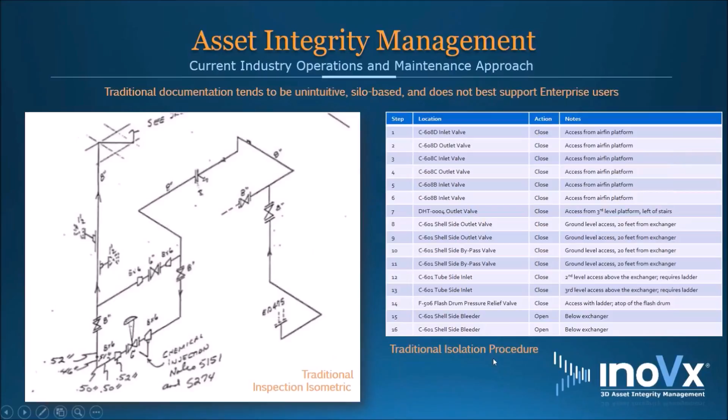And what INOVX is doing is taking the old way of doing things and really turning it on its ear by integrating that active 3D model with your current systems of record to replace your isolation procedure with something much more intuitive that provides context, that provides much better insight into what's happening and what needs to be done for that work. We're getting comments from companies like Shell saying that an hour inside of the INOVX technology is like spending 8 hours in the field.

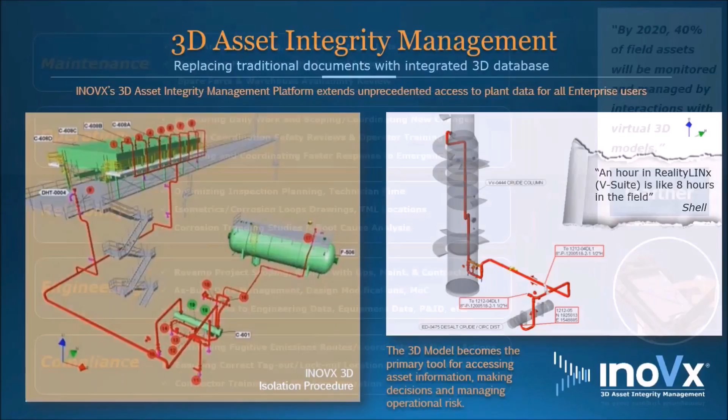What we're doing is really bringing the field to the desktop. We're bringing it to the tablet, allowing for users across your enterprise to come together in a virtual way and solve problems rapidly with good, consistent information. This extends beyond just inspection and maintenance. We go into areas of engineering, compliance. When we talk about things like inspection, of course, that really speaks to reliability, optimizing the way your resources are focused.

We'll get into some of these specific examples in a little bit, but what we've really seen with our platform is that because we're implementing this active model tied to your existing systems of record, the layers of additional solutions become natural.

We've got a single hub of very virtual or very intuitive look into the facility, and maybe if you start off with an inspection solution, we'll hear from one of our guest speakers, it can very quickly grow into other things to help the enterprise with other activities at the facility.

And so again, we'll get into some specific examples here in a little bit, but it's really no wonder that companies like Gartner are saying by 2020, 40% of these assets will be monitored and managed in some way with virtual 3D models. And we believe INOVX is at the forefront of that as a thought leader, and we'll show you some examples. Because we're integrating with existing systems, the kinds of things that we're able to do is visualize your facility in ways that you couldn't previously.

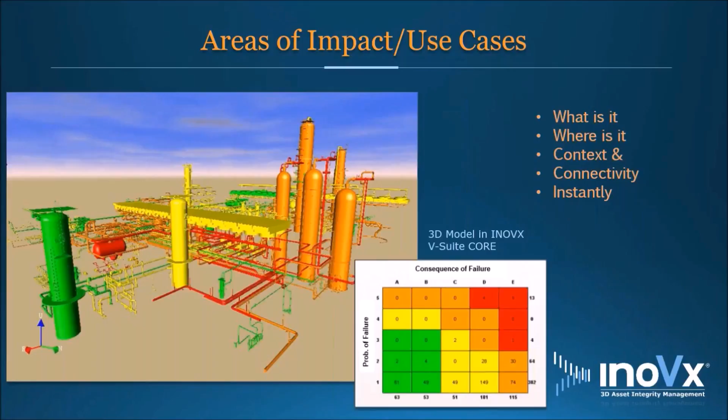And these are the kind of things that we're doing for things like corrosion or things like safety zones, and very quickly visualizing your plant and your assets in ways to help decisions be made and actions going forward. One of the other examples that we really talk a lot about, and you'll hear more about this today, is around inspection, mechanical integrity.

This is an example from NCRA or CHS, and we'll be hearing from them in just a moment, where they've really taken their entire mechanical integrity system and used this active model to replace or augment what they were doing previously. And so this little control valve manifold here is a representation or a replacement of that inspection drawing. So this is the way that INOVX manages that drawing, if you will, in something we call a knowledge view. And again, we'll show you some live examples in a moment.

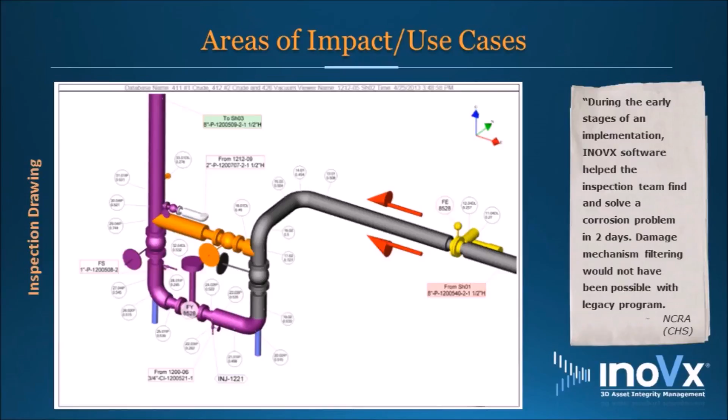And each of these points represent either an inspection node or something that needs to be done, say a dead leg example. And the color coding also fits with some information that's tied to that system of record. I think we're going to go into a little more of what this means when we introduce our guest speakers, and I think that's probably a good segue to introduce that. Today we're going to hear from CHS, and so Susanna, would you mind making the introductions, please?

Yeah, thank you, Dave. So you're going to have CHS. The McPherson refinery is an 85,000 barrel a day refinery with most of its crude oil that it refines from local Kansas producers. The refinery is currently undergoing expansion to 100,000 barrels a day, and its primary products are gasoline and diesel. Our panelist, Jason Frazier, is a plant engineer, and he's worked at the refinery since 2009, supporting the fixed equipment and the mechanical integrity program, including plant-wide piping inspections and RBI initiatives.

He's also responsible for developing the plant-wide 3D virtual model, including all of the process units, or 27 different units. He's a graduate of Kansas State University with a BS in mechanical engineering, and he's also a certified API inspector. Randy Lanhart is the engineering supervisor, and he's been at the refinery since 2010. He's managing the fixed equipment and mechanical integrity program, including the plant-wide piping inspection and RBI initiatives. He's also a graduate of the University of Nebraska with a BS in civil engineering, and he's a registered professional engineer and certified API inspector.

So with that, we're very excited to introduce Jason and Randy, along with Dave Reinhardt, facilitating the discussion. Dave, Randy, Jason? Thanks, Susanna. So what I'd like to do is, first of all, thank you, both Randy and Jason, for joining us this morning. What I'd like to do, yeah, great.

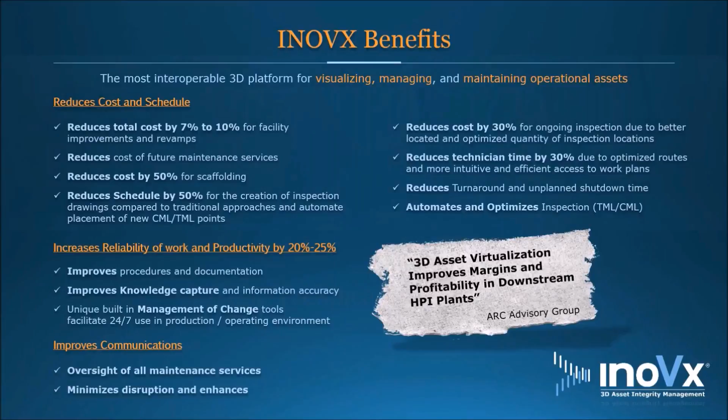And something that we'll talk about in a little bit is an onboard unique management of change tool that INOVX deploys that allows end users like CHS to maintain and sustain that model in an operating environment. So the big difference between what's happening at the plants versus when we're creating models is they're needing to use it in a 24/7 environment for all the kind of things we talked about. So we're seeing a lot of benefits across the board. ARC says that our 3D asset virtualization improves margins and profitability in downstream plants. We're actually seeing that upstream also in different markets.

So having said that, we'd like to go to a technical demonstration. V-Suite actually has several components. As I described previously, it has a client-server application piece. It has a web-enabled component, and we even have a tablet or a mobile component that we can take offline and actually bring these advanced work packages into the plant.

And so as part of this demonstration, the first thing I'd like to do is review the desktop application. This is what we refer to as V-Suite Core. And this is really our authoring tool, or how we create the content. And so when CHS was speaking to us, they're primarily using the desktop application. So we'll go into a little bit of how that's being used, not just there, but in other sites around the world. So what we're seeing here today is the user interface.

And on the left side, we have a database browser. This is my sample project. I've set something up for inspection in this case. But again, this could be for things like plant maintenance or construction scheduling. Today, we're just reviewing mainly inspection, but hopefully you can draw some lines to some of these other solutions.

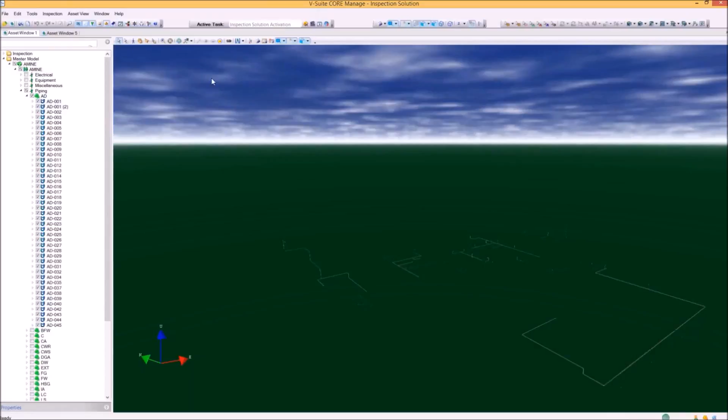So the first thing you'll notice is that I have a hierarchy here, sort of a folder structure that's not unlike my Windows Explorer. I've got a tree, and if I drill down in here, I can see different kinds of assets. And by checking the box, I actually can display these assets in my view. Let me just turn on all the piping. And so this is the piping in my sample model here. If I want to turn on the rest of the model, I can just check that box.

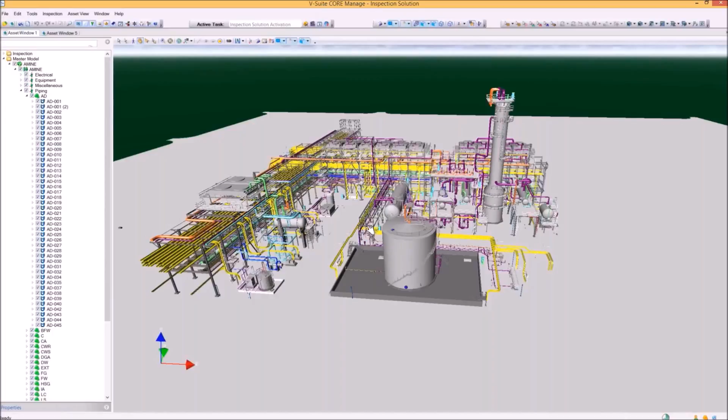V-Suite Core is a desktop application. It doesn't really require a heavy-duty computer. I've got probably a 3 or 4-year-old laptop I'm running off of today. And so you'll see I can quickly turn on and off different sections of the model. I can drill down and navigate and see how things are organized.

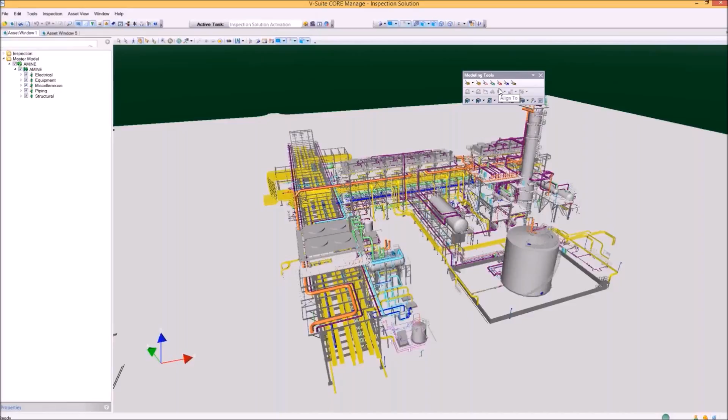Now these models are created, as you could hear in the earlier discussion, either from laser scanning or what we call model conversion. So we have some really good modeling tools in the software that allow us to build from scan data. INOVX is also a partner with Edgewise 3D, and so we can leverage automation. We also have some good assisted modeling tools.

If you have a 3D model that's already been created for your engineering, we can actually update this from different CAD sources. And so we have lots of ways of creating these models to get something deployed quickly and also accurately. And we can go into much more detail on that, but given the time today, let's dive into some of the solutions.

So the first thing you'll notice is that I've got this model organized by engineering discipline, if you will. I've got these different hierarchies organized by the engineering discipline. And one of the things that INOVX does is we have a role-based application, allowing users to log in with different roles or responsibilities and also have different entitlements in terms of what you can do. I'm logged in as an administrator right now, and I can see the 2 different workspaces.

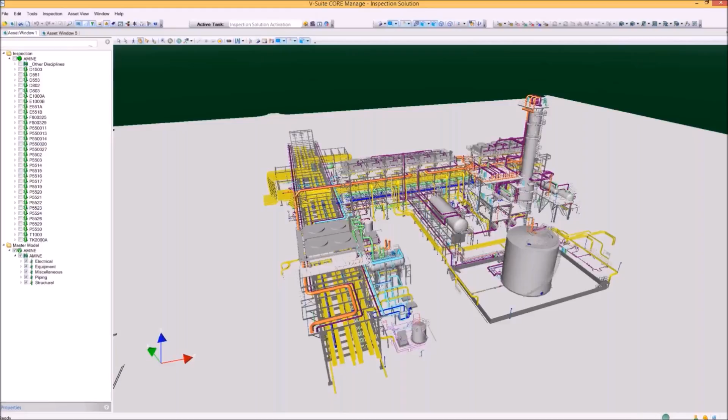But if I was just an inspector going out to either perform inspection or create work packages, I would only see the inspection workspace. Now what's interesting about this is it's exactly the same model. It's just organized differently, and I'm seeing them both here in the same view. So if I clear my screen and turn on the inspection workspace, you'll see it's exactly the same model. Maybe there's some different color coding, and maybe things are organized differently.

And so in this case, I've got my corrosion loops or my inspection circuits. It looks like I've got all my inspection points turned on. Let me just turn those off. And so now I'm seeing the model very much how I'm used to seeing it in my system of record, like PCMS that CHS was using. We also integrate with other systems like Meridium and others.

And so this model now is organized just how I would expect to see it in the way I manage my work. And for this one, again, we're looking at inspection. So with V-Suite Core, we have this extensibility and interoperation that allows me to integrate with these different systems.

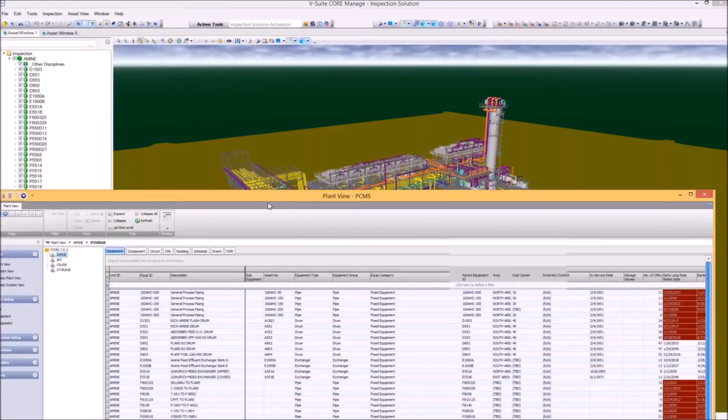And so I'm going to go ahead and log on to my inspection program. And what you're seeing now is that V-Suite is actually connecting to the target system. And what I've got is a system of record. In this case, we are using PCMS. And so what it did is it logged in.

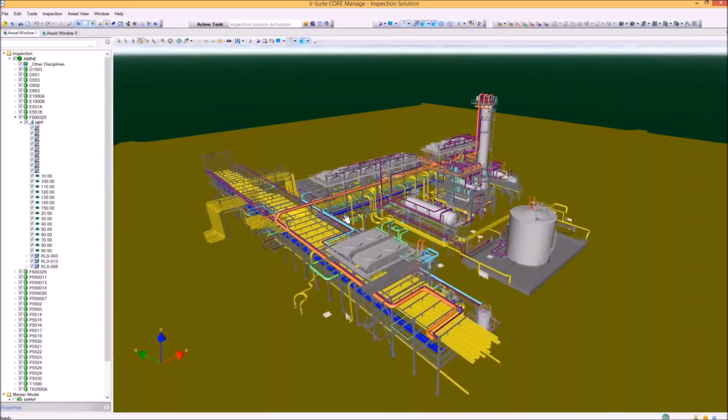I've got the application loaded locally for this demo, and so it fired the application, and it's running in the background. We can also configure that to just connect and not necessarily run the application. So you don't even have to have the app loaded, but it will connect. And so now not only do I have access to my different circuits and loops and various attributes, but I've got information about those assets that's being pulled directly from my system of record.

So in the interest of time, I'd like to jump ahead and show you some of the things we're doing with that. And so one of the things that our inspection group might use is the searches or some of the advanced tools. And so one of the things I might do as an inspector is say, well, I'm really interested in understanding what I have to do in the next 30 days. And so what I can do inside of V-Suite Core is say, hey, go ahead and find that information for me.

And so what it's doing when I run this search is actually reaching into the system of record and saying, well, look, in the next 30 days, I've got these 61 points that I need to go and inspect. And so, albeit this is interesting, it still doesn't really tell me where it is and what it is and how I'm supposed to work with it.

So as part of our inspection solution, what we can do is configure this to actually automate the creation of those drawings that Jason was mentioning. He's calling them inspection ISOs, really, but what they are is what we call knowledge views. And we can create this inspection work package on the fly.

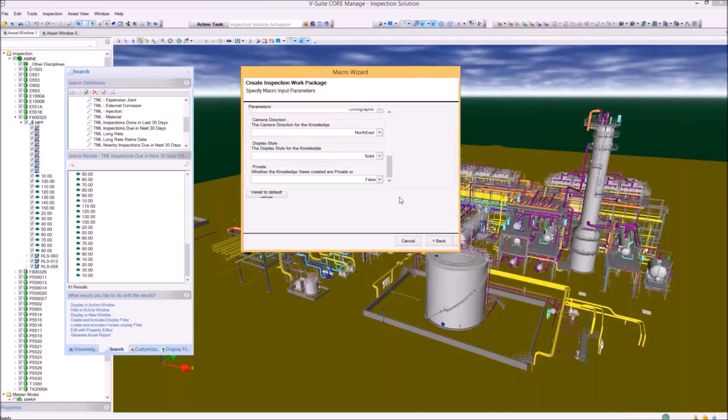And through a wizard, we're actually using that search definition, we're getting these 61 assets, and we're telling the software, I want to go ahead and create these views, I want to understand where it is and what it is, and go ahead and create the knowledge views. Now, if I was to launch this, it would probably take about 5 or 6 minutes, so I'm going to cancel this now. But what I'll show you is sort of what the results would be.

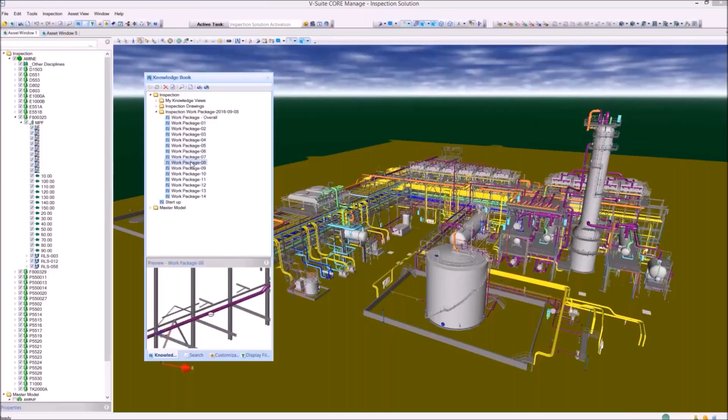And we have this thing called a knowledge book, because the model organization is interesting, but in fact, what we're finding is that to create these work packages, our knowledge book is where the power really lies. And so the results from that query that I just ran was an automated creation of these knowledge views, or active isometrics, as we like to call them.

This is an active 3D model, and it creates that work package that says, okay, not only are these the points that you have to inspect, but these are the adjacent equipment and adjacent structure, and it's not just a 2D static image, but it's actually a 3D model. And so as I zoom in, I can get some context about this. I can take measurements, I can click on these assets.

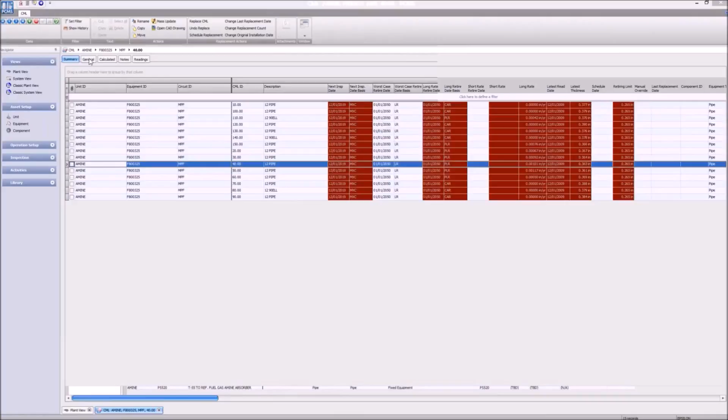If I select any one of these points and pull up the inspection properties, it actually goes directly into my system of record, retrieves that information, and takes me right to that field in that record. And so this is actually the information about that item. And so I've got this interoperability between my systems.

As Jason described, we can color code based on these results, and that's what we're doing in many cases. We have another one of our end users that's actually taking this data now, and through filtering, we're displaying the model with red for failure and green for good, and then all the colors in the middle for how corrosion and damage is being tracked.

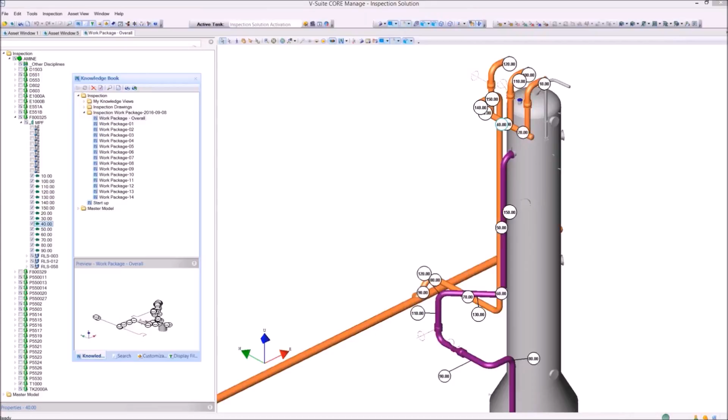And so this is a very robust system to allow me to organize the model, set up my advanced work packages, and create these knowledge books that I can then distribute out to the rest of my user community. And so this is just a quick look at the desktop application.

So let me bring you now into the web tool. Once we have accessed and created our different work packs, what we can do is actually launch V-Suite online, and let me go ahead and do that.

And so by setting up your entitlements and by setting up your different user communities, I can actually go out to my server, whether it's on my intranet or maybe it's up on something like Amazon and hosted, and I can sign into V-Suite, and I can access those same knowledge views from anywhere within my enterprise.

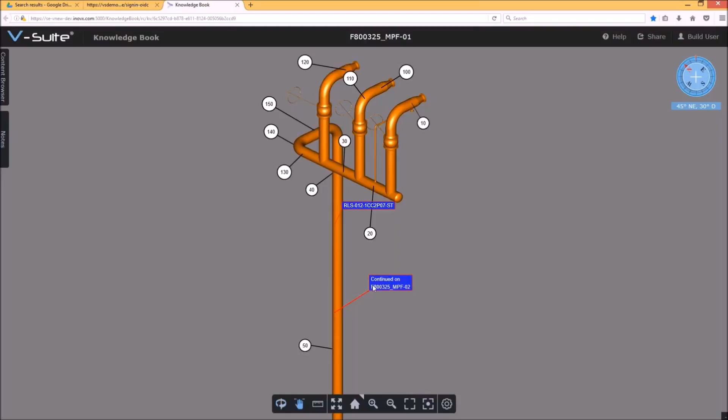Now, where this adds power, of course, is through a web-based architecture. I can now launch this and make it available to my entire user community, to my contractors, my subject matter experts that might not be available in my local office, bringing people together from around the world. And these knowledge views now are available to me in my online space.

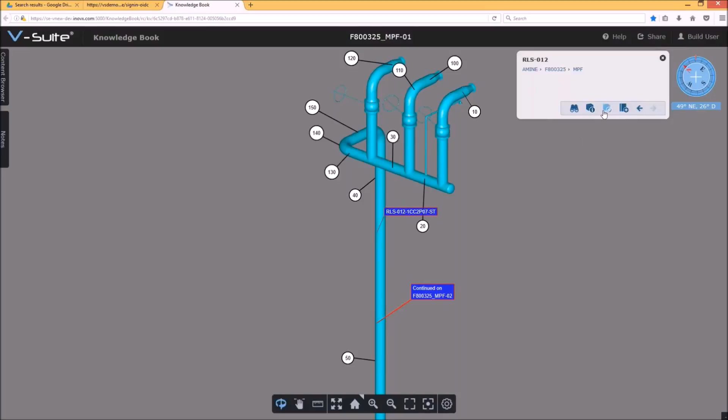I've got the same sort of interaction that I did in my client-server desktop application, and I also have access to the asset information. So by just clicking on these assets, I get a little quick tip here. I can navigate up in the hierarchy and maybe select this entire circuit, and I can get more information about that.

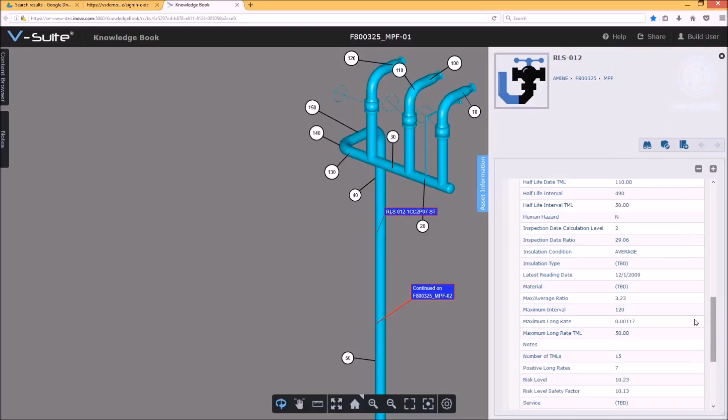The same is true when I have access to the system of record. So for example, now I've highlighted the entire circuit. I can get more information about that. Here's some circuit information. It's actually going live now out to, in this case, PCMS, and extracting that data and getting what I need for my work pack. You'll see when we talk about the mobility in the tablet, this same information is available in an offline mode, and I'll show you that in just a moment.

And so what I like about this too is now when I've got my mobile and my tablet, we also have the ability to create new content. We have the ability to capture more information. And so one of the things that we'll do as part of these advanced work packages is we'll set up the ability for end users to capture notes, capture information, or if it's part of a work package, we might actually include information about what needs to be collected.

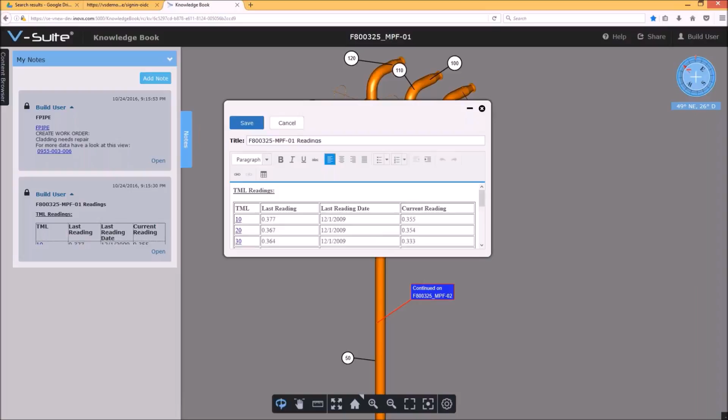So for example, if I'm going out there to inspect these points, one of the things I might need is information, say the last reading that was captured, or maybe if it's a lockout tagout procedure, it might be the sequence of events of things that have to happen, and this could be a template that drives this work pack and what's available to you.

And so as an inspector, or maybe it's a maintenance person, if I finish the task, I can simply go here and edit this activity, and maybe this one is 0. Let's say 300, something like that. Save my results, and when I'm online, this immediately is available to my other V-Suite end users in the tablet. If I'm in offline mode, that information is still captured, and then once I have access to my network again, it's immediately pushed back up to the V-Suite database.

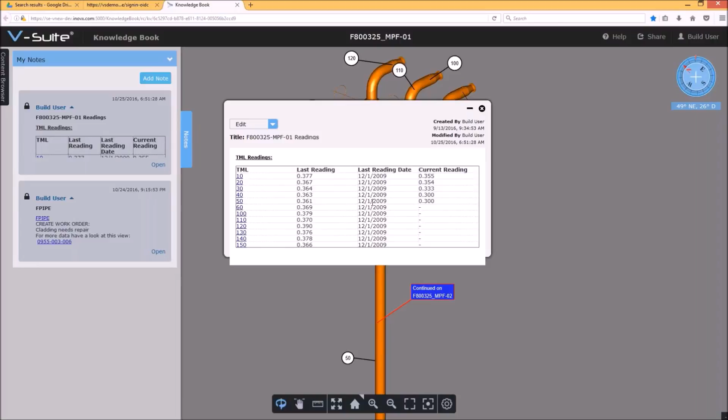Now, what's really, I think, even more powerful about this is that I have the ability to also, through our adapters, push this information into the systems of record, depending on how your IT is configured. Okay, so there's certainly a lot to talk about here, and we'd love a chance to show you a little more about this. But given time, I'd like to go ahead and jump forward to some of the mobility stuff. I can't show you a tablet on the screen here, so let me go ahead and just fire up a video, and I'll bring this over.

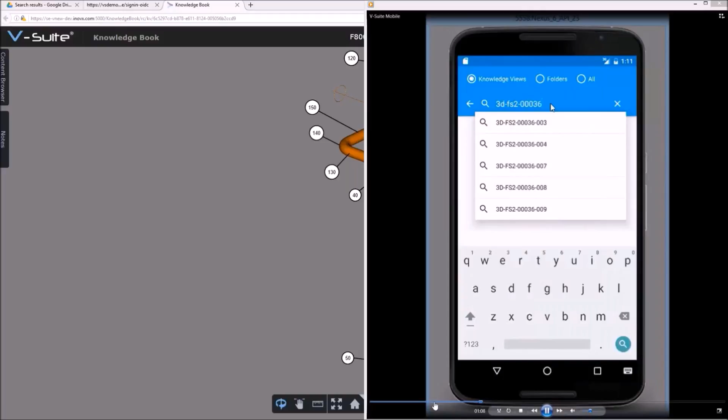And so what we have today is the ability to load the V-Suite Knowledge Book for your tablet and mobile device. Today, this is an Android system. Early next year, you'll be able to use iOS. And so what we're doing here is in real time, we're showing how you can log in. And if I have certain knowledge views I'm looking for, I can begin to query that, and I get a lookup list based on what I've begun to type.

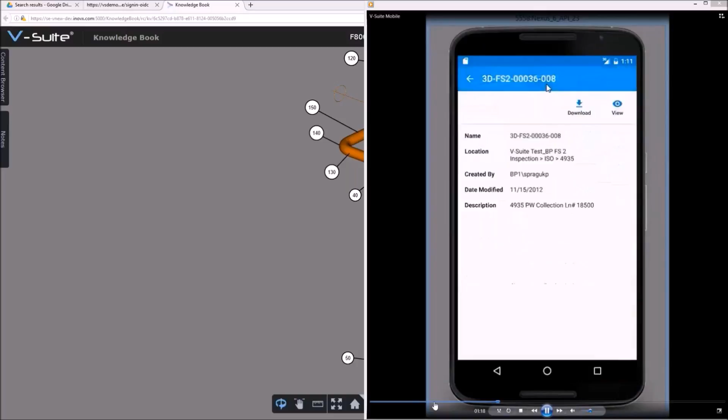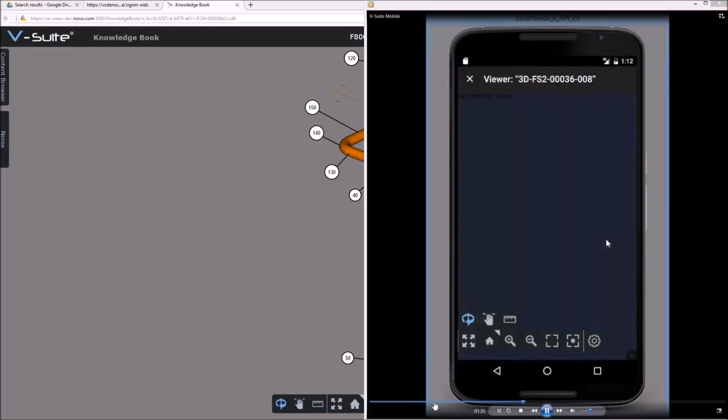I can search for that, get a list of my different knowledge views. Maybe this is my work package. And again, all of this can be done in an online mode or offline. And again, this is really powerful because now I can take that tablet into the field, and all of that data has been downloaded for me.

And so not just the graphical representation of that inspection loop or of that shutdown or turnaround plan, but the metadata behind it. So if I have inspection information from my system of record, or if I have something out of Maximo for my maintenance record, all this is made available directly on my tablet offline as I synchronize.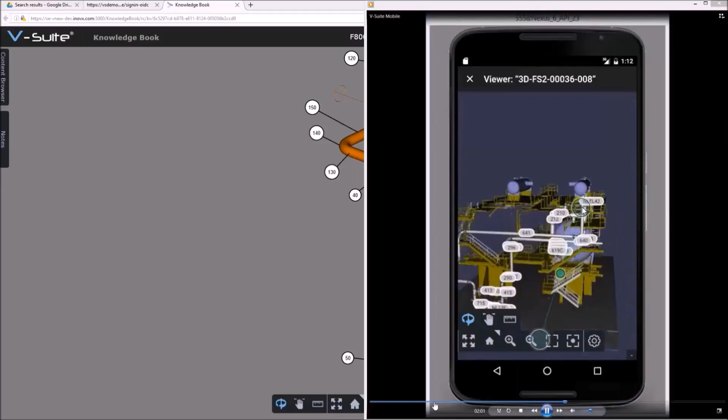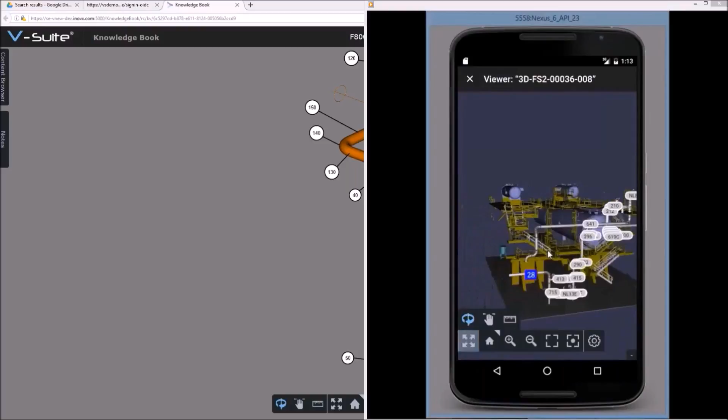And you'll see I'm able to sort of pan and zoom. I can look in, I can click things and query, and then move around inside this view so I can really have context. Again, bringing the active 3D model to my desktop and to the field. So that's just a quick look at V-Suite. We've got the client desktop application, you've got the web, you've got the tablet.

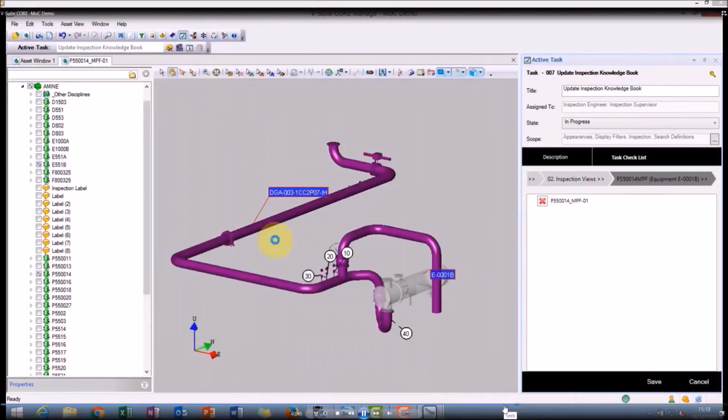Something else I wanted to introduce today is a little bit about what we call management of change, and for the 3D model is our MOC. There's certainly a lot to talk about here too, but one of the things that is definitely unique about our system is that V-Suite was designed for the end user at the facility. And so in order to really facilitate the use of active models inside the plant, we have to have a way of enabling end users to leverage the model in a 24/7 environment while making changes and updates.

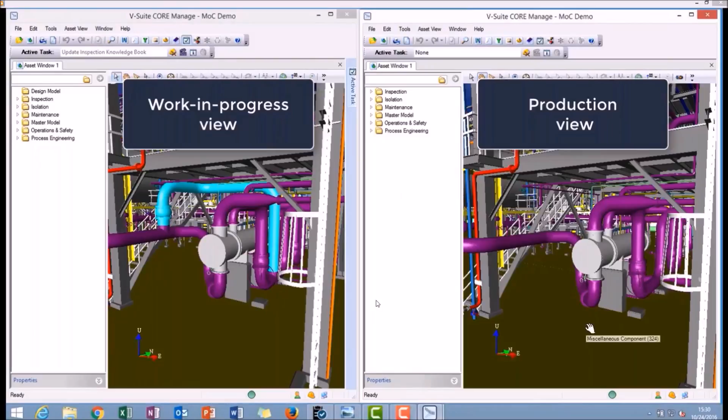And the way we facilitate that is, again, it's a multi-user application. And so we can create these activities or these work orders, and these work in progress views of that active database, changes can be made all while in the production view, the end users can continue to move on and work and do the kinds of things that Randy and Jason were talking about. And so this work in progress view, we can set up different permissions, different tasks, activities, authorizations, auditing and journaling, and all of this allows for this maintain and sustain in an active production environment without ever republishing.

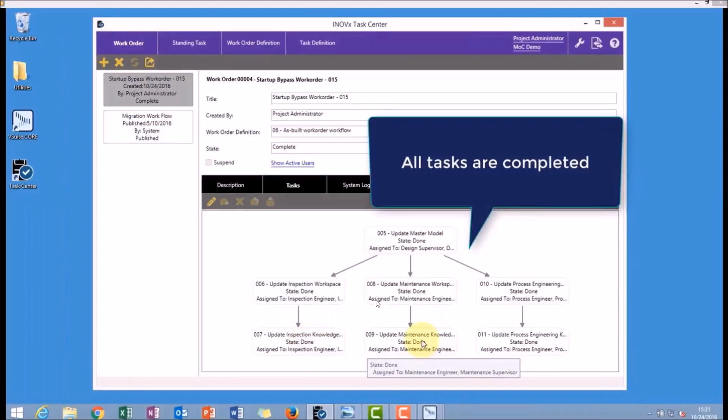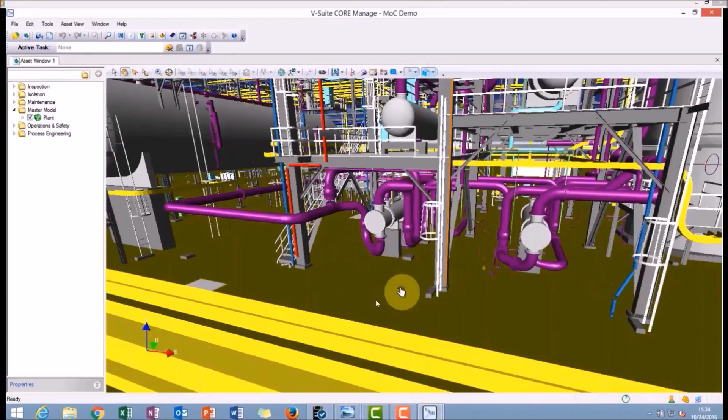One of the things I heard Randy say was when they were using the 2D systems, they basically had to update and overwrite some of those linkages they were creating. But once we move to V-Suite and we have this active model through our activity center and the Task Center, we're able to update your 3D asset without ever going offline, without breaking linkages, and maintaining that interoperability.

So now that the changes have been authorized and published, I can go back to my active production model, and if I find that line that we were using as an example, we have change history. We have an understanding of what the changes were made, who made it, and we have the ability to see how things were done and even roll back if we need to. So that's a little bit of a look at V-Suite.